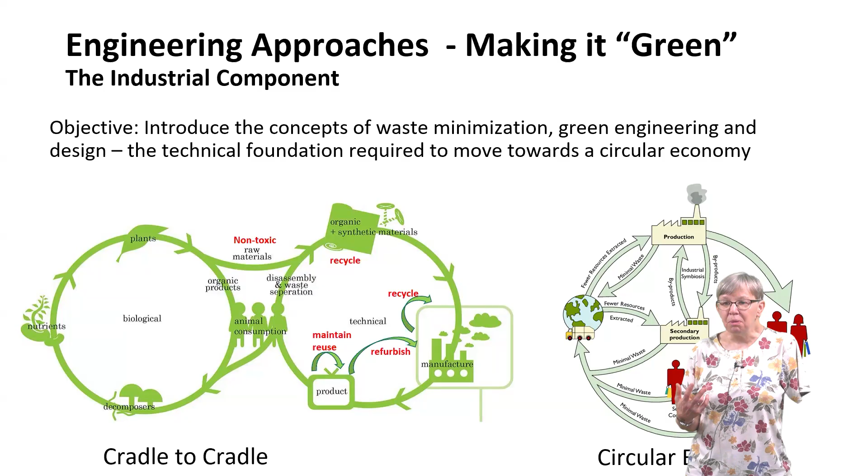So those are the two essential elements of the circular economy.

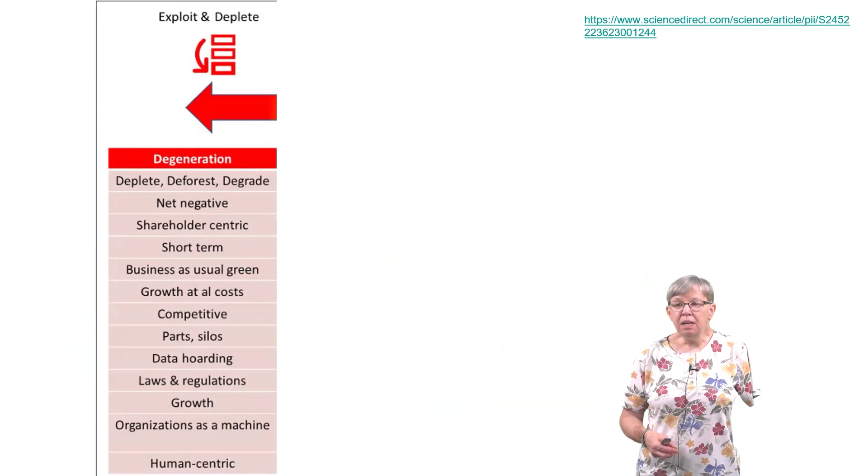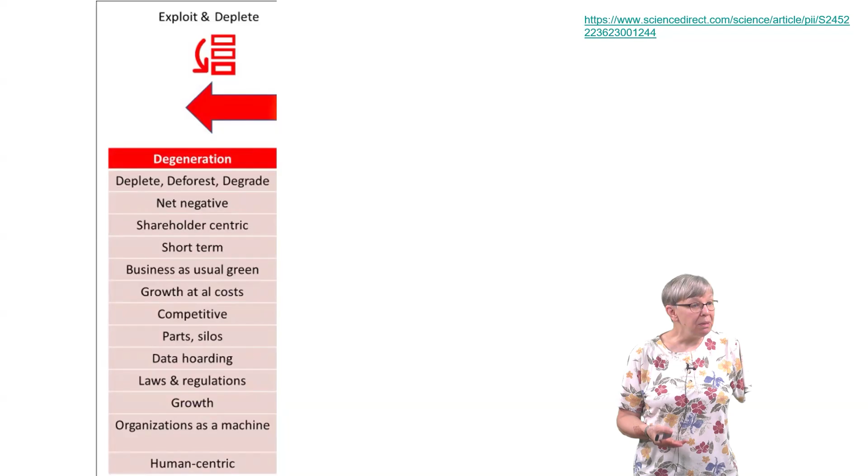So let's just briefly review the history. Until about 20 years ago, maybe 30 years ago, we were in this exploit and deplete sort of mentality with industries, and some industries are still there, right? They're not worrying about any of this. They just want to make a profit, and that's all that they are thinking about. And it's not economically viable, right? They would be doing economically better if they thought a little bit more.

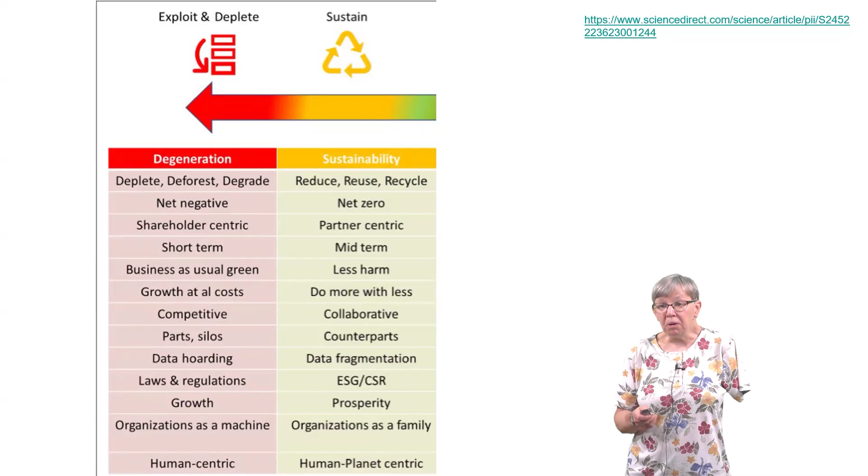Right now, we're sort of in this sustain what we're trying to do mode. So we hear the terms net zero, less harm, collaborative, ESG, prosperity. So it's more of a combined human and planet-centric approach, which is what sustainability is, with humans being both the social and the economic.

But where we really need to get to - remember that first day with what Professor Indu showed us with meeting the planetary boundaries - if we really, truly want to sustain our Earth and sustain our life on the Earth, we need to think about this regeneration and regenerative approaches. Has anybody heard that term before, or applied to any industry?

Regenerative farming. Absolutely. I'd say that's where the most progress has been made. So in my part of the world, that means that you have cows who are out in the field, they're pooping on the field, then you put the chickens out in the field, they eat the undigested grain that's in the cow poop, but the nutrients go back into the soil, and then you grow crops after it's been fertilized and basically weeded by the chickens. So that's regenerative - you're not adding pesticides, you're not adding nutrients. And it also, with better growth, you don't need to add as much water. If the soil is healthy, the soil retains more water. So that's a great example.

Anybody else seen this term used in anything regenerative, anything other than agriculture?

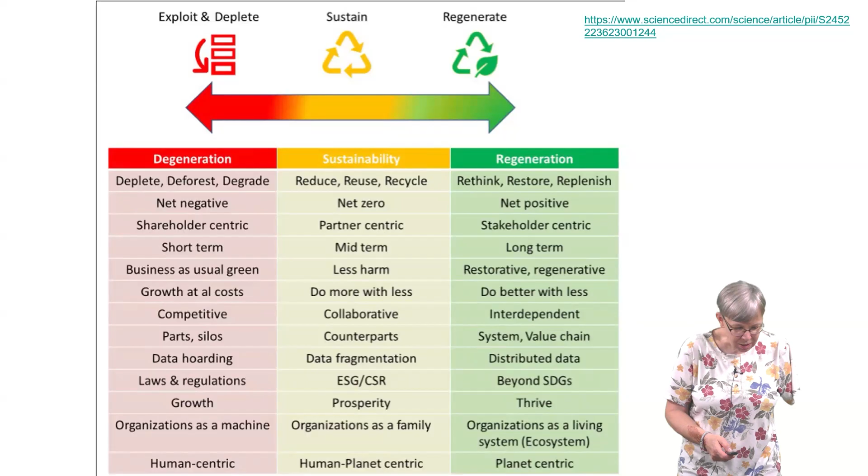So we've talked about all these words: remanufacturing, post-consumer, pre-consumer, recycling, reuse, non-toxic, use of organics. I think you get the cradle to cradle or circular economy philosophy. Everybody's on board? So now let's think about how we do that.

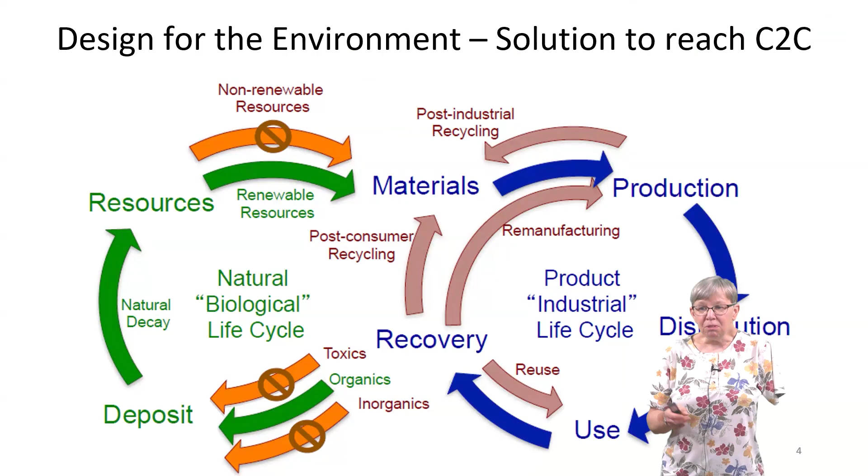Remember, I told you this first cradle to cradle document came out in 2002 - so this is about the era, 2 decades old. This is from that first book. These were the first set of rules you might follow. We're going to go beyond this, but just to give you some idea of the starting point.

In India, can you still buy compact fluorescent light bulbs? Anybody buy light bulbs? In the United States, they've been totally replaced by LEDs, in part because LED technology has progressed so rapidly in just like 5 years. But it does away with that known culprit - how can we make a light bulb that doesn't have mercury in it? We can make LEDs and sell LEDs instead. I don't think you can buy compact fluorescents anymore, at least not the things you'd screw into a typical light fixture.

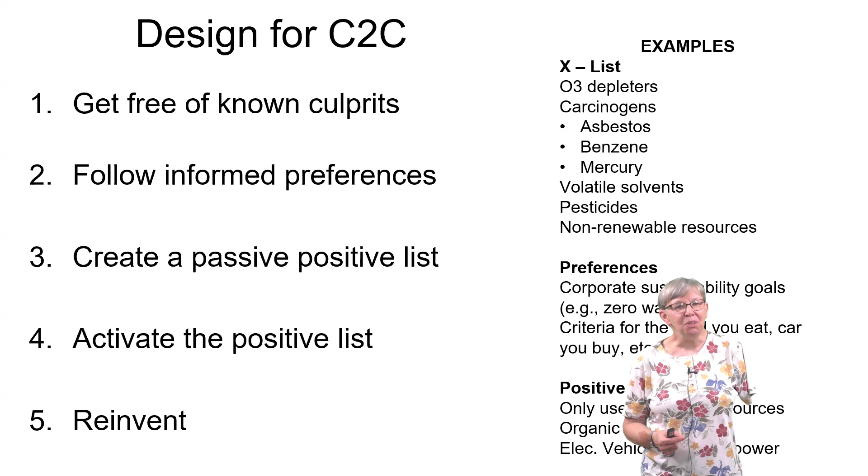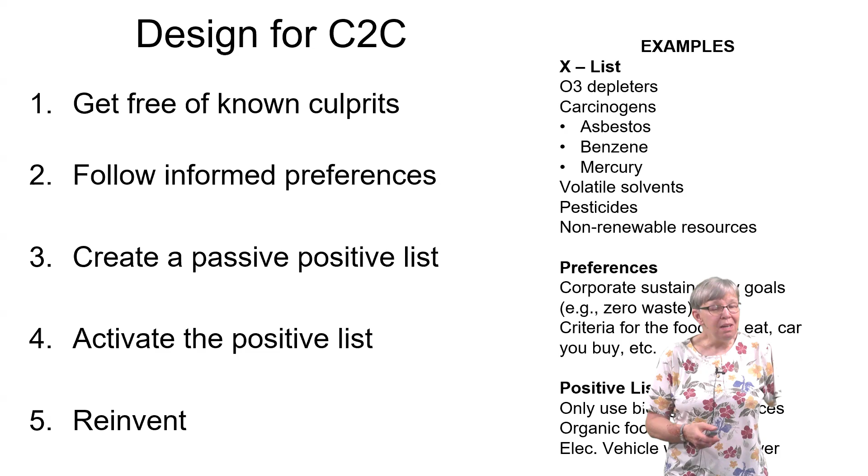So don't just talk about these things, follow through and do them. And then reinvent - that's that big word. Reinvent gets us to that green zone I showed on the first slide - just totally rethink the products and our systems and why we're doing this to begin with. We're going to talk about that a little more, the big picture changes, tomorrow. So that was the first one.

As history has progressed, we've talked about this circular economy, eco-industrial parks. There were some images on day 1 or day 2 notes that I didn't get to, but there's a place in Denmark doing that - industries are sharing water, they're sharing waste heat, they're sharing gypsum, they're sharing all sorts of material, energy, and water resources.

Green technologies - we've seen some green technologies: the anaerobic digester, the fuel cells, the electrodialysis, solar. We've seen green technologies, and some of you are working on green technologies.

What our projects are oriented around is this new concept of product use and product - what are we doing, what's the end of life? So this is all those R words. I have them, not just R words, but that list of 11 R words that Professor Indu showed you the other day - just keeping them in the circular economy. So that's sort of what we're talking about now.

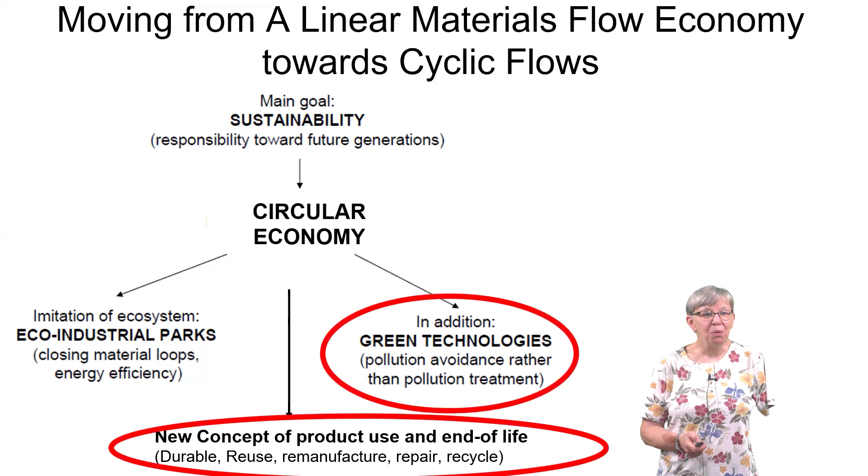So pollution prevention. Yesterday, my number one rule of pollution prevention: if you've got a really concentrated waste stream and a dilute waste stream, do not mix them together, because then you've got a whole lot of volume you've got to treat. That's why I asked Professor Indu yesterday about the dye and the textile industry mixing that really concentrated material with something a lot less concentrated. We hadn't gotten to that slide yet, but their recommendation was to not combine those, because otherwise you have to oversize your treatment system to treat all this volume.

There might be reasons to do it both ways, especially biologically. But for any physical-chemical treatment process, that's basically the number one rule of pollution prevention: don't make more polluted water than you started with, which is basically what that textile industry is doing.

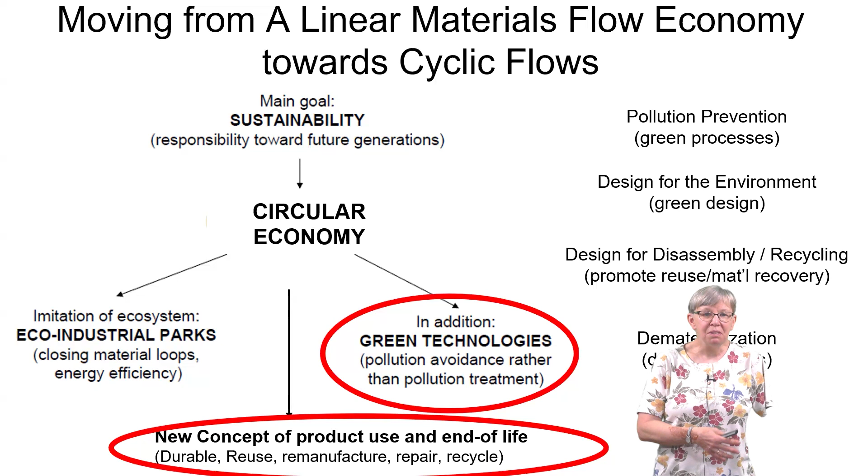Design for the environment, that's what we're going to talk about today, and that includes disassembly, recycling, dematerialization. All of that's part of design for the environment.

So we want to change the products, or how we use them, or how we make them, or how we manage them at end of life, something along any step in that life cycle, the raw materials used, any step in the life cycle, to reduce material and energy use, and reduce the toxicity and hazard of the materials. So anywhere in the life cycle we can fix.

So when you think about your projects, it might not just be the materials used. It might be, can we just use the lights less frequently? Can we generate less food waste? Those are other places in the life cycle that are sort of outside of what you're looking at in your project, but might be very realistic changes that have a bigger impact than tweaking something.

And so you really need to understand the life cycle impacts, and that's why we have this as a tool. We've got these ways of thinking about changing our designs, but then we've got the tools to actually assess: is this better? Because sometimes we make changes that don't end up being better, or they're better in one sector but worse someplace else. There are other tools too.

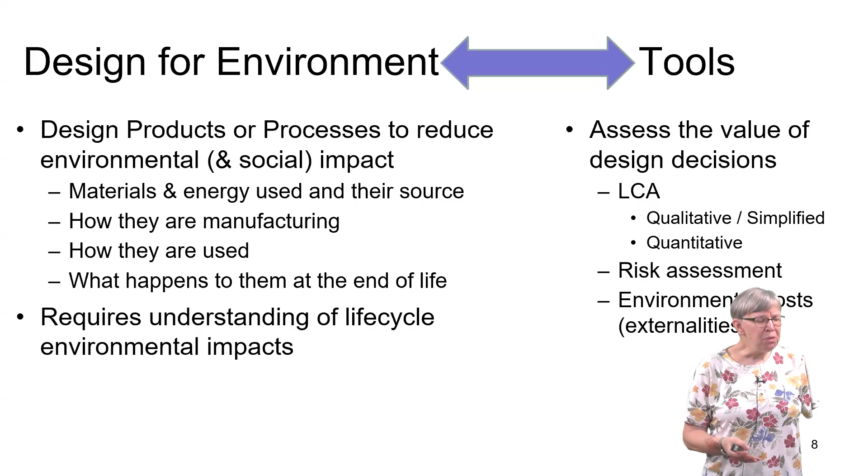There's a lot of talk about that when we're talking about nuclear energy. In my neck of the woods, people are very concerned about the risk, and the risk can be horribly catastrophic, like the Fukushima meltdown that happened after an earthquake and tsunami wave in Japan. Absolutely catastrophic for the people who live in that vicinity, but globally it's not catastrophic, and it's also very, very low probability.

So that was a case of very low probability, high consequence, local impacts. If you compare that to climate change: the probability of climate change is very, very high, super high, it's happening right now. The consequence is coming in slower than the probability, so it's maybe lower right now. And the geographic reach is global. So we have a very high probability, consequences that will get worse and worse—right now they may be moderate, but they will get worse—and a global reach.

So when you think about whether nuclear energy is something that will help mitigate climate change, yes, there are risks, but there are also risks to burning coal. There are risks to any of our energy systems. People think about the risks of nuclear energy because of those very few, very low probability, but catastrophic events when they happen. It's not like they will never happen, but it's very low probability and localized.

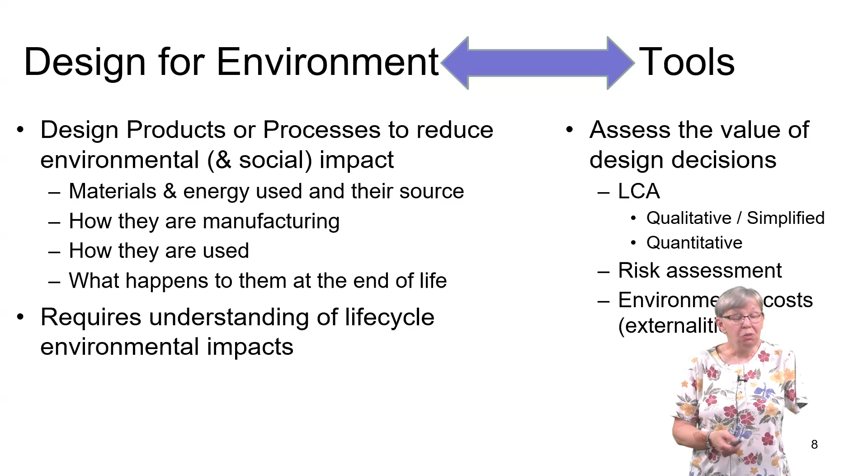So it's hard, right? But that is another tool in our toolbox to think about design for the environment: risk assessment. And then also environmental costs, which we're not really talking about here, but the externalities—the cost associated with the Fukushima disaster was billions, maybe even trillions, I don't know a number. The cost of something like superstorm Sandy hitting New York City, which is very highly populated, was billions, and that's a climate cost. So there are ways to think about the costs of these things associated with the environment. We're not going to do those here, but I want you to know there are more tools in the toolbox to do this kind of work.

Can we turn the AC up a little bit? I'm going to have to take my glasses off, I'm steaming up over here.

But anyhow, there's a couple of examples, and you looked at some of these on day one when we looked at the Ellen MacArthur Foundation — the same sorts of things.

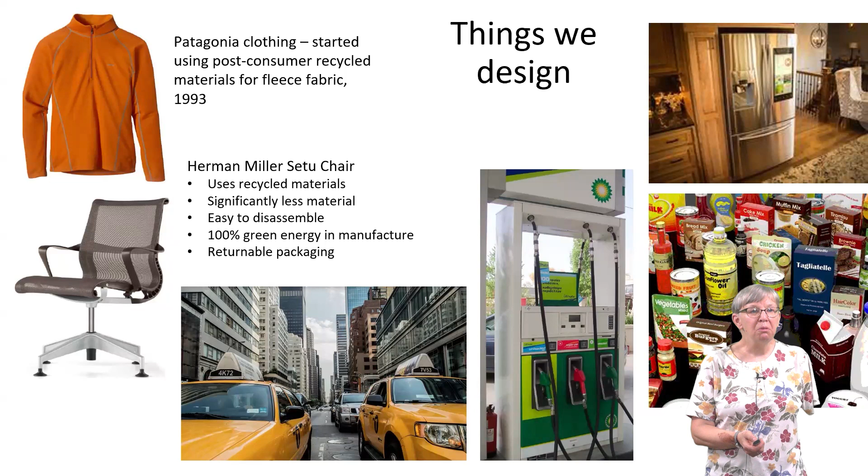We'll talk about cities tomorrow, but more about chairs today. Remember, we've seen this picture in a couple of different ways. You've got to know if the challenge with your product is material intensive, or about end of life, or about how we use it — you need to know that to know how to best fix it.

So if you have a laptop computer and your biggest concern is the energy use while using it, what are you going to fix — that littlest of the blue bars? Maybe it's a good thing to do, but your energy might be better spent thinking about the materials it's made out of and how much of that material you need.

You might still need some of those rare earth minerals, but can we use less? You might be able to cut that bar. It's partly in the actual materials, but also where they come from — if some of those rare earth materials were recycled instead of mined, that would cut it.

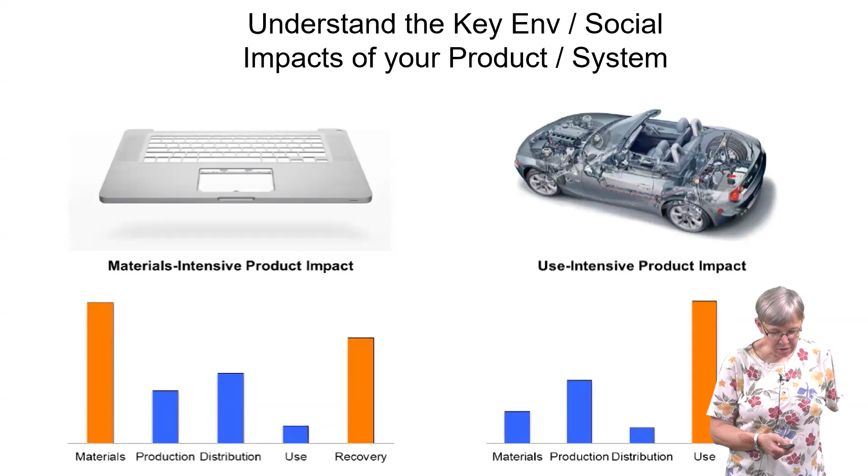But in an automobile, the use phase is most intensive, so changing how much energy it uses during use would be the most important thing to do. It's not that you don't want to still work on the other things, but if you only have so much money and brain power, put it toward your priorities.

All right, so we need to know that. Minimize — if you have less material in your product, you have to pay for less. It's just like food waste: if you're not wasting food, you're feeding more people with the same amount and don't have to buy more.

So it's a huge economic benefit for industries, and sometimes that's how you have to talk to them — not about environmental impacts, but that making these changes will reduce their cost. If you're removing toxic materials, you'll reduce the cost of hazardous waste management and wastewater treatment. There's almost always a capital cost to change.

There's always a capital cost to change, but over time, the benefits of buying less inventory and treating less waste are really, really valuable — or maybe you can even sell your waste, since your waste product might be useful to somebody else.

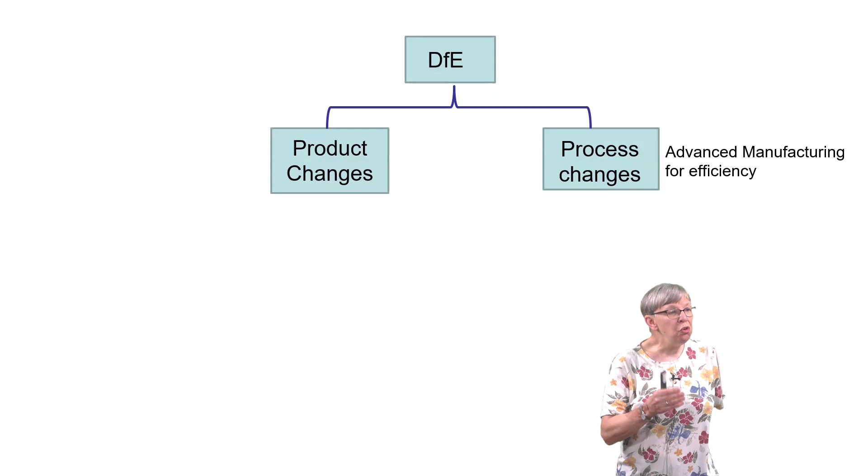So in design for the environment, there are two big categories of things we can do: we can change the product, or we can change the process — how we make it, how we use it, what we do with it at the end of life.

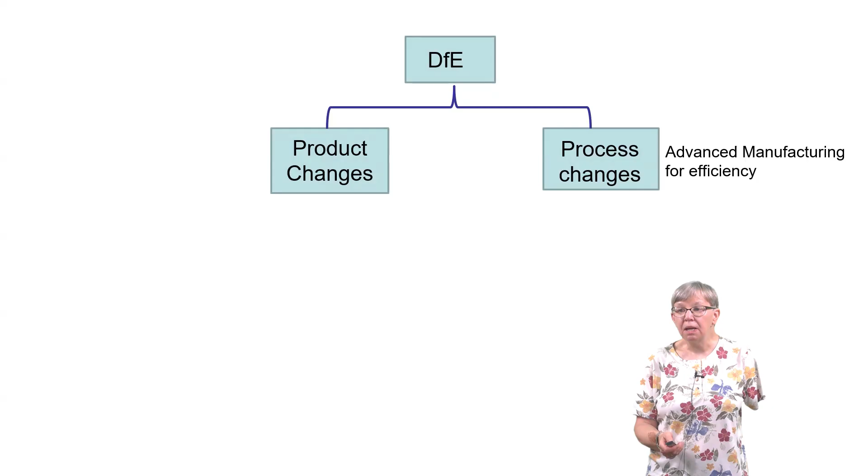So both of those things are possible when you think about the changes you might make. Product changes mean we can make a different product.

Why do we need this? Should we be making this to begin with? Those are pretty big questions, but also think about materials - less material, less toxic material, maybe bio-based.

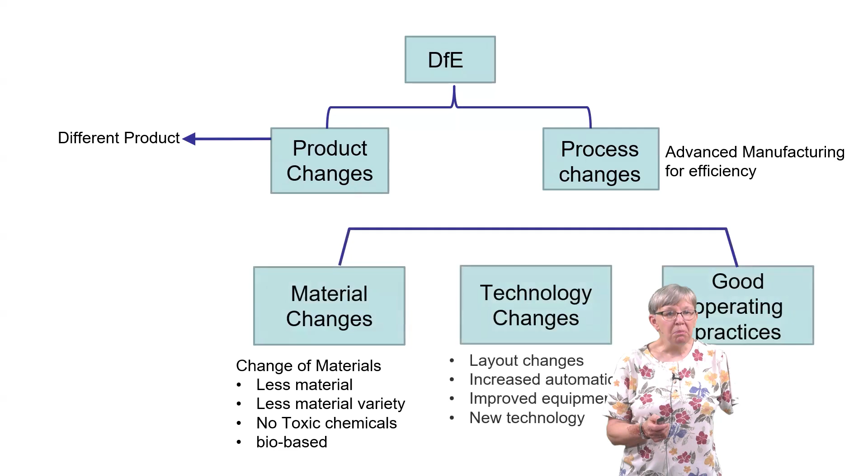And for the process changes - some of my animations here didn't come through. In addition to the material changes, that results in a process change. You can change how you make it, the technology, your manufacturing line, you can add advanced manufacturing. Advanced manufacturing is the talk of a lot of robotics and automation and sensors and controls. That often increases efficiency greatly.

How much of that raw material that you bought actually ends up in your product? Because it's more careful, there's less human error. So advanced manufacturing is a really good thing for design for the environment.

And good operating practices - that's again when I started doing sort of pollution prevention, the first step in all of this in the 90s. Even when Indu was a student, and Laura Weber, a fellow student back then, went into industry and looked around - that audit, somebody talked about a water audit. That is a design for the environment.

You go look, if that faucet's drip, drip, dripping - that is waste. It might be a faucet of water, but it might also be a faucet of some more hazardous material or something more expensive. So making sure the valves work, that things are working the way they're supposed to be working, because it might have been designed great, but it's not operating the way it was designed - the manufacturing facility or how we use it.

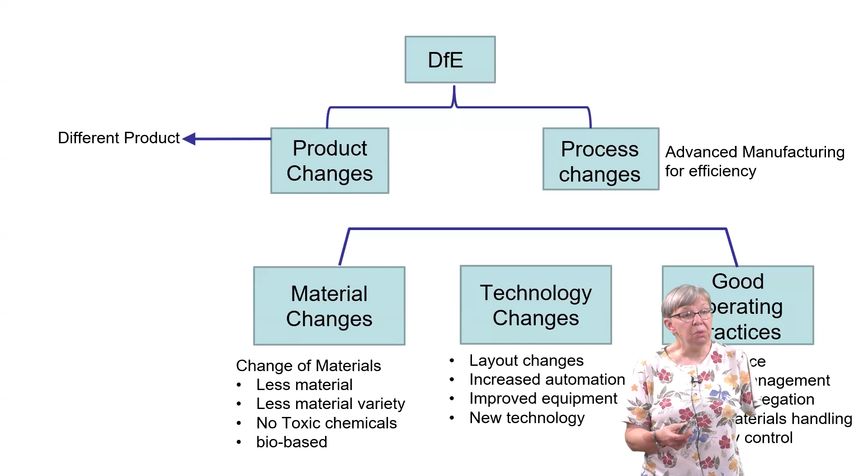So those are, big picture, all these different things that we can do to think about your product or the process. And these lists right here, most of these changes are just in the manufacturing side, but it can also be on the use or end of life side as well.

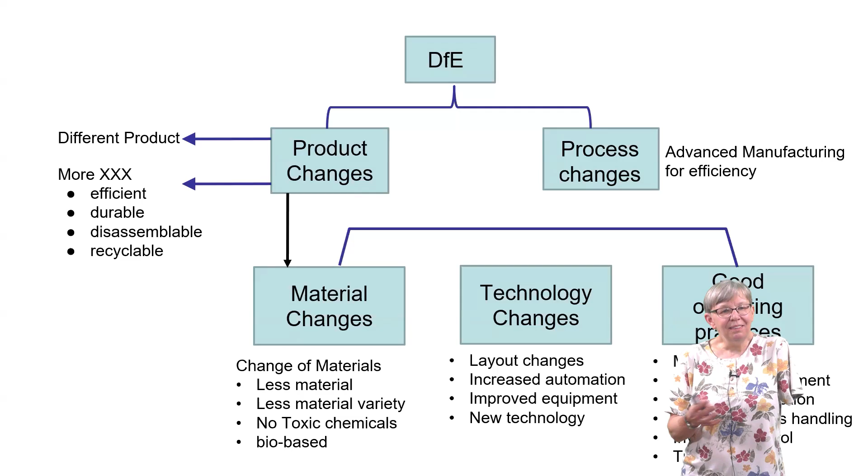All right. Yes, my animations definitely ended up in the wrong order - sorry. So often you have all sorts of things you're trying to accomplish in a product change: efficient, durable, disassemblable, recyclable - all of those are words. That's part of the product changes.

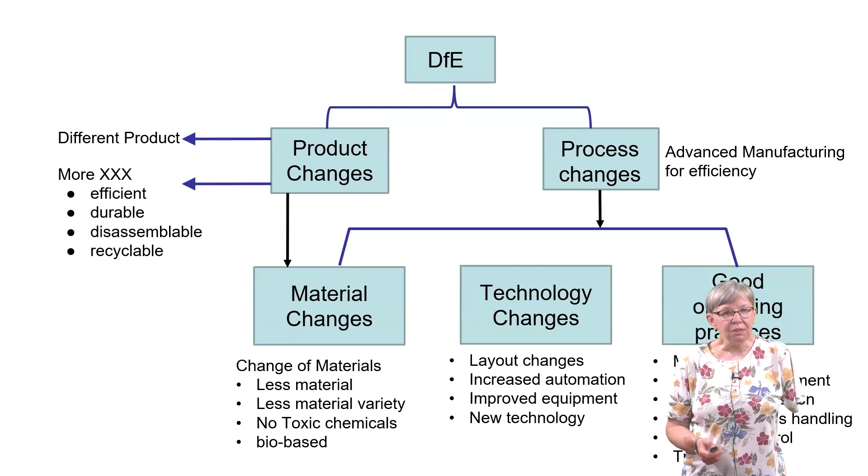I don't know if you've seen some of this. Many forms of design for the environment. So industries in India right now are designing for zero water discharge. That's a design for the environment.

Not necessarily - we heard yesterday it might not necessarily be the overall life cycle system's best solution, but that is a design for the environment approach. Design for zero something - zero toxic, zero energy, zero water, but also efficiency, maybe manufacturability. This is something that's always been done - you want to design something that can actually be made, and maybe made in a more efficient manner.

So it's all sorts of design for - these are all designed for the environment. We're not going to go through all of these, but I just wanted to let you know that there's lots of different approaches for this.

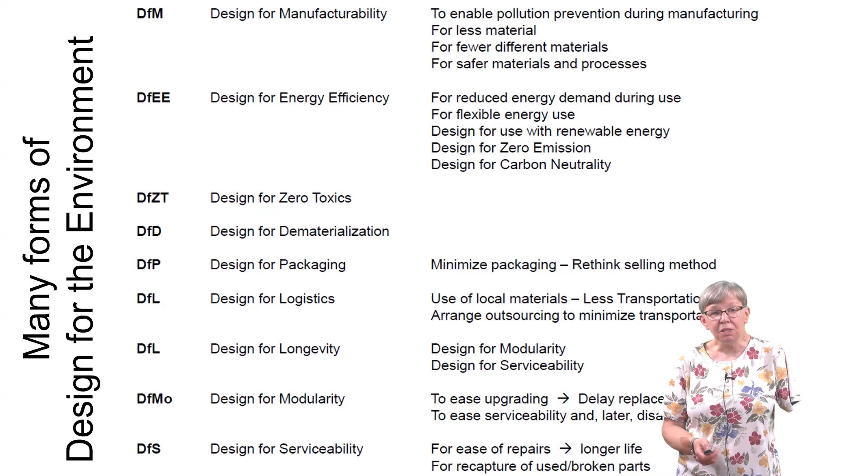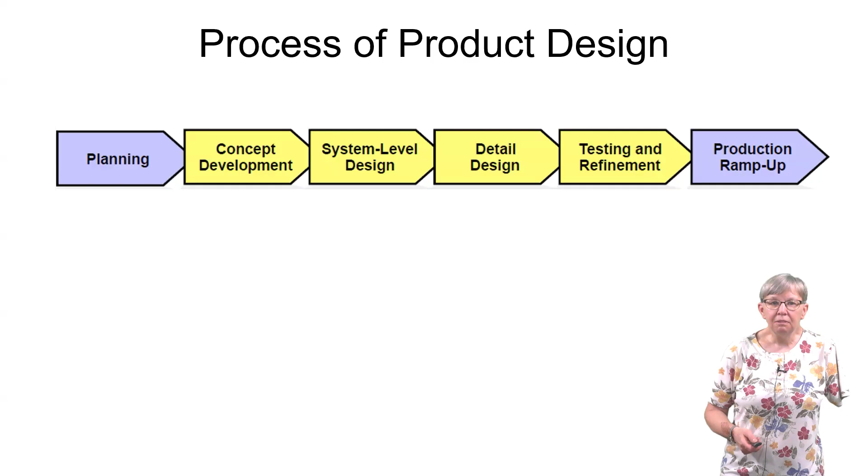It is really, really important that design for the environment elements come through at the beginning. It's much easier to do this from the start of your design rather than redesigning a product. When you're thinking right now maybe about redesigning products, but this is really - you want to start it from the concept development, avoiding the known culprits, right? All of those things from the cradle to cradle list, and we'll get into more lists. There's all sorts of lists.

So mostly this today's PowerPoint, I'm not going to go through all the details, but it's a resource for you to think about what those lists look like. But it's really important to do it at the start, and once you've manufactured or you've got a prototype and you test it, you don't just test whether it technically does what I want it to do, but did it meet my design for the environment goals?

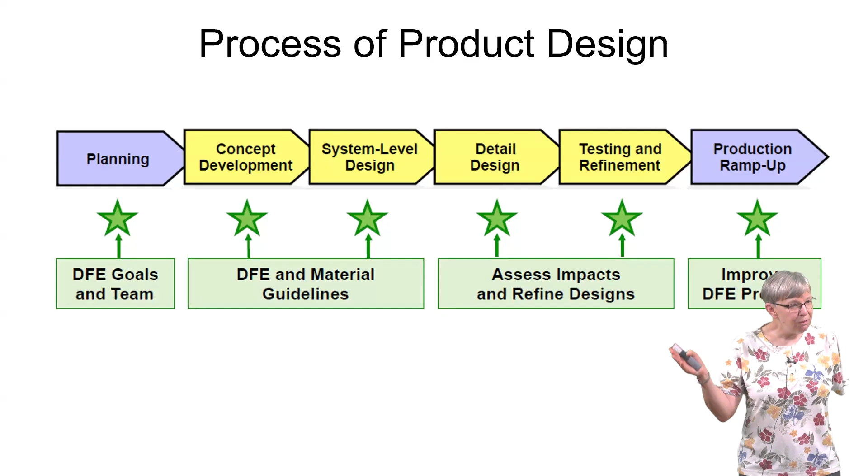That's got to be part of that prototyping, pilot, whatever the steps are, you've got to check it again. You do not want to build at full scale and then have to go back and fix it at that point. If somebody says design for the environment, you want to do it at the beginning.

The life cycle assessment really comes into play once you have a detailed design and some pilot testing. Earlier on, you can use more of the guidelines, but you don't have data to do a life cycle assessment early on. Once you start to get a detailed design, you can model the system. You can look in the literature, and even though you don't have pilot scale data yet, you do have the capacity to still do some level of life cycle assessment.

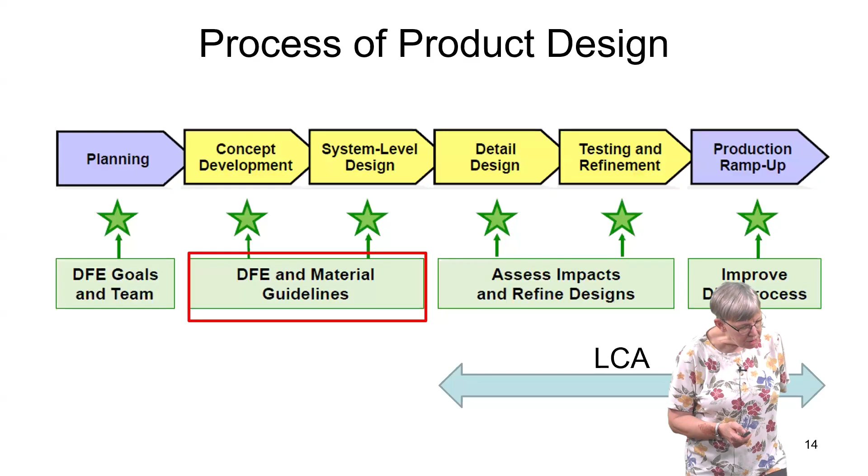We're going to dive somewhat deep into these material guidelines for design for the environment. There's a lot of words on these slides, more than usual, because this is a resource for you. We're not going to go through all of these—anybody can call out and pick one.

Use screws and other fasteners that can be undone. Every time you build something with rivets, you cannot take that apart to reuse the material. If it's something that is screwed together, then you can unscrew it, take it apart, and reuse it. So that's just an example.

You can't recycle it. Somebody mentioned fiberglass recycling—I don't remember who or where, it was sometime last week, maybe in one of the research tours. Fiberglass is really hard to recycle because you've got the fiberglass itself plus all sorts of epoxies that are hazardous, dangerous, and toxic together. So it's really very, very hard to recover the glass part.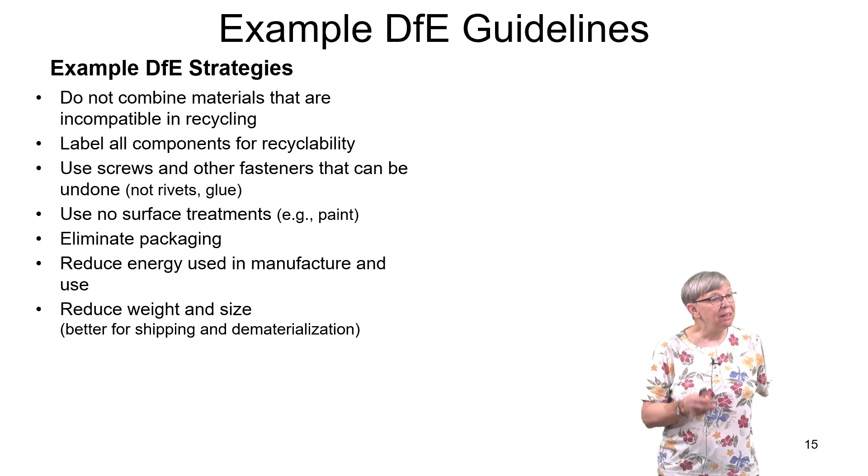Same thing with carbon fiber material—it's a great building material, but then you can't really recycle it. So the more you can stay away from those multi-layer constructions that you can't take back apart, the better for recycling.

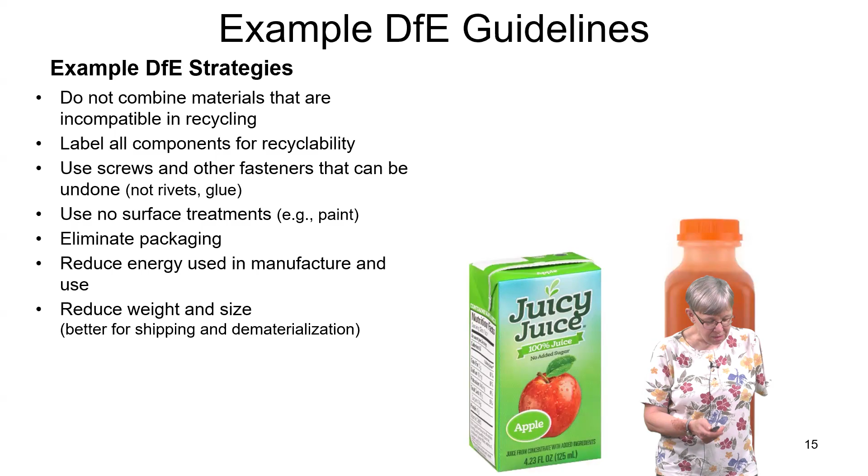Oh, there's my juicy juice box—I know it was on one of the slides. So the alternative is just polyethylene, which can be recycled. That's an example. They both function the same. You don't have the nice little straw, and maybe if you've got little kids, there's more likely to spill from the bottle than the juice box. But for everyday purposes, the one that is easier to recycle has all the functionality of the other one.

PET is the same way—it's the easiest to recycle. So those water bottles are at least easy to recycle, but we don't do very well recycling them. In the US, only 10% of plastics are recycled. We'll probably get to that after break.

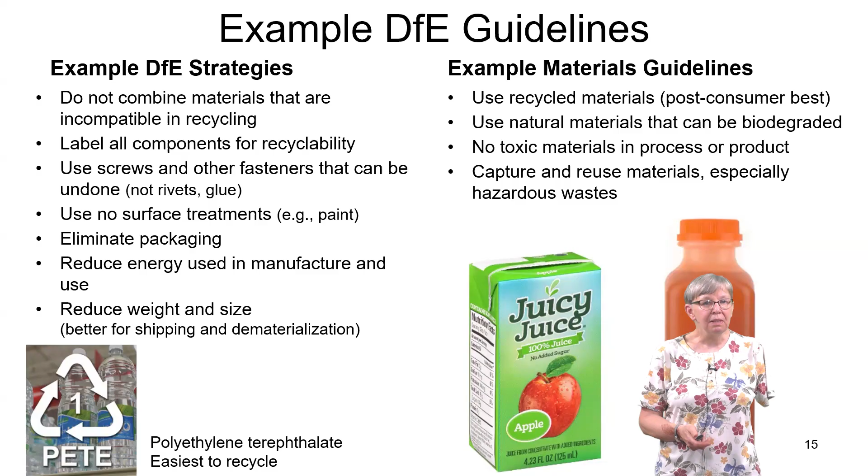Good guidelines—using recycled materials, the more you use recycled materials, the more there will be a market for them. The circular economy only works if there's a market for those materials. You might feel great putting it in the recycle bin, and then it gets separated, but if nobody's going to buy that and provide some economic value for it, even though you did your part, the circle is not complete. So all pieces have to be complete. We've talked about all the rest of those.

We're going to do an activity here. For people online, I don't know if we can go to Zoom—how many people are online now? Nine. Can we put them in three breakout groups?

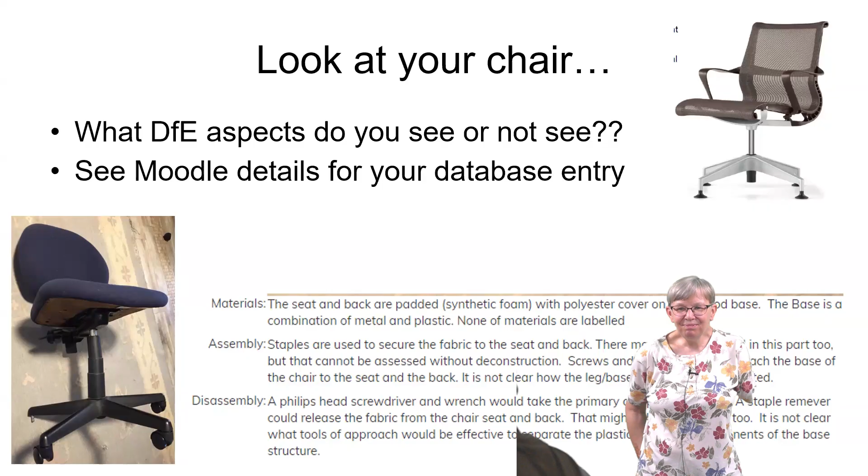All right, so greener materials: non-toxic, bio-based, low embodied energy, right? Even if they're from non-renewable resources like steel versus concrete versus wooden structures, those are things to consider—but also chemically safe and healthy. We're going to talk about that a little bit.

So just an example I found in India—the Indian Green Building Council, which we heard about 2 days ago. Here's a paint manufacturer that received a Green Co rating.

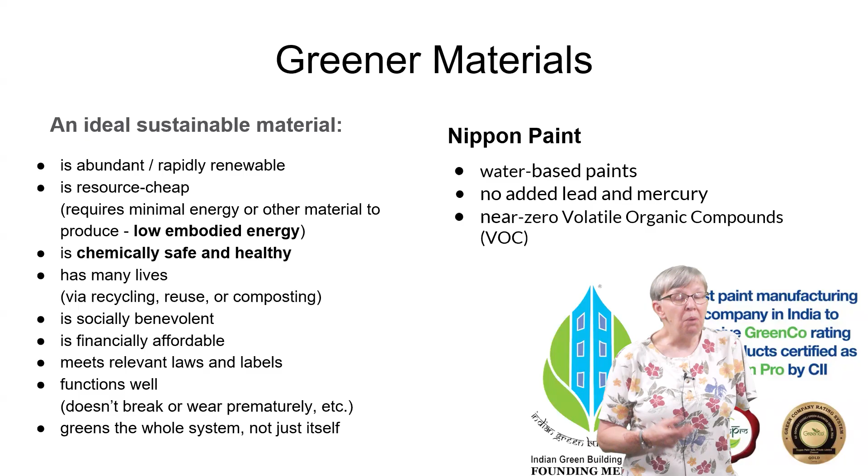It's water-based paint, no lead or mercury, which are sometimes added as part of the pigments, especially lead, and near zero volatile organic compounds—so you don't get that new paint smell, or that new car smell. Those are VOCs, and they're dangerous for you. You might like a new car smell, 'oh I've got a new car,' but it's really dangerous—it's all the foam in your seating off-gassing volatile organic compounds that are not good. So that's an example of a product and a company committed to this.

So embodied energy, we've already heard about—I made this slide before Indu did her stuff, but I'll leave it here. There are all sorts of lists of embodied energy and carbon dioxide output. There's one more list—you had a couple from citations down at the bottom, the circular ecology carbon footprint database, which are in Professor Indu's textbook. If you don't have her textbook, that's a site you might check for information about the embodied energy of materials.

It depends on what your system boundaries are for embodied energy. If you're using a product, the embodied energy is everything upstream of making it, but also its ultimate disposal. If you're a manufacturer, the embodied energy is everything upstream of that manufacturer and everything downstream of it. So whoever's in the middle, whatever use phase you're in, everybody else is the embodied energy. But that data is available.

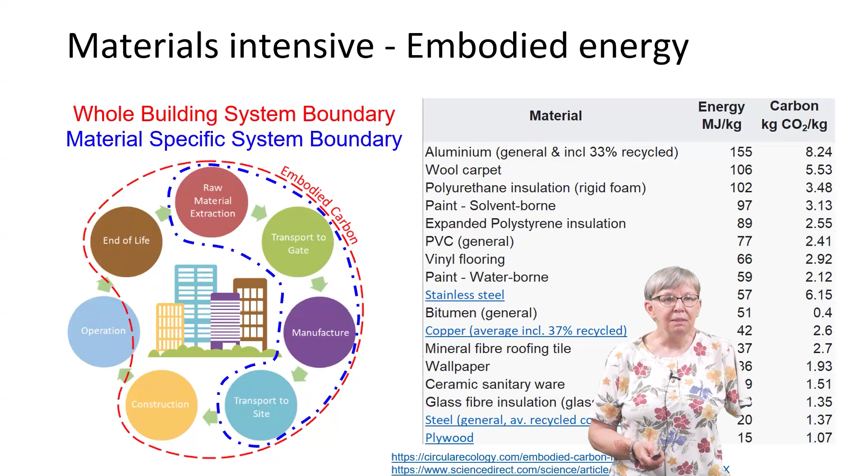So it's very much a life cycle approach, and they're looking toward this too. It's something to look for in the future, something to pay attention to—we're not quite ready yet to teach you how to use this because it's not quite there.

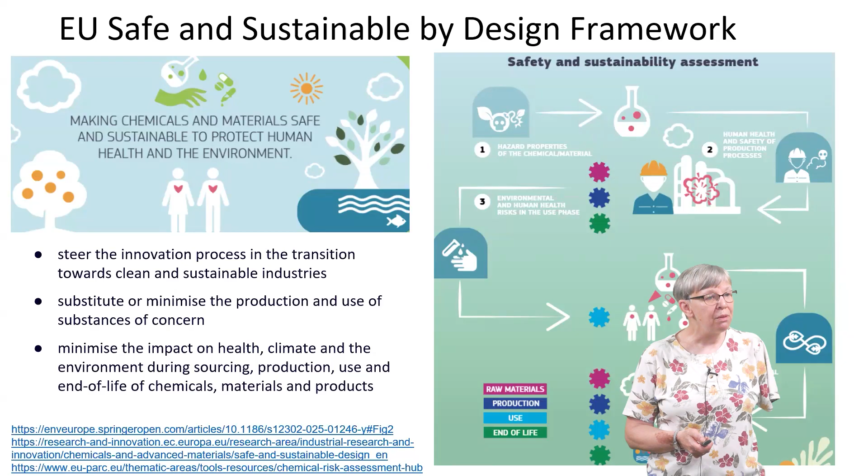But it is something that is up and coming because there's lots of people doing the same thing that you're doing here, learning how to do this. So this will be another great tool that will be available. It has more risk assessment built into it as well.

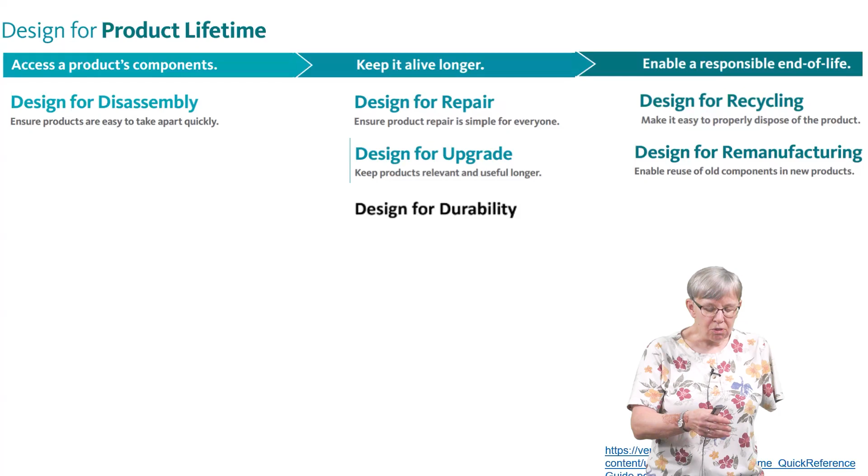But basically, you want to think about the product's components, how to keep it alive longer, right? The more durable it is, that's key. Just use, before we think reuse and recovery, just use it longer. Buy clothes that are made to not fall apart. Just using it longer is the number one thing you can do for the circular economy. And then enable a responsible end of life, so recycling and remanufacturing. There's a long list for each one of these at that link.

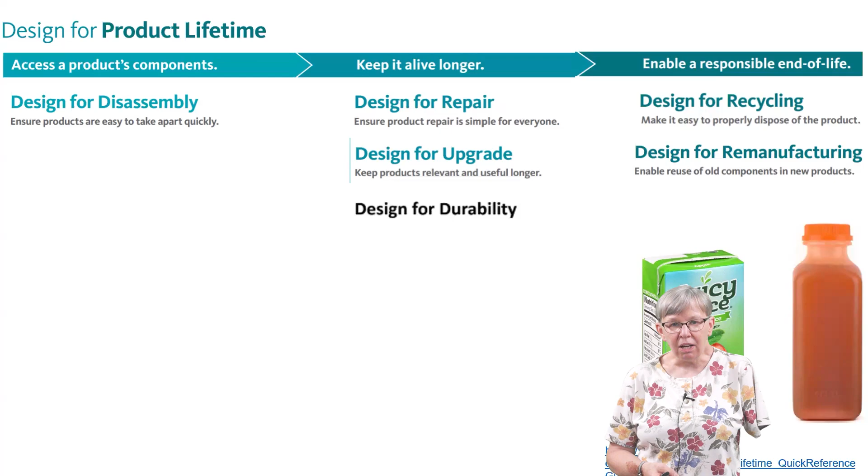So we talked about this juicy juice, the juicy juice is not designed for recyclability, right? It might be designed for ease of use for the consumer, it packs well. There are boxes, so if you think of cartons and transportation versus the top of the other bottle, this packs a lot. This is the detail, as I said, that I am showing you so that you know this is in the PowerPoint.

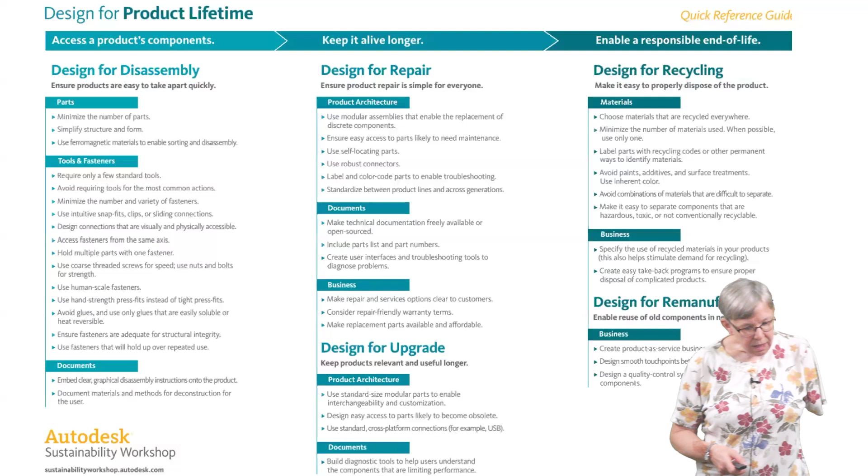So when you're thinking about your projects, what does design for disassembly mean? Is it something that would be relevant to my product? You've got this whole list. So I gave you the big words, but I'm not going to talk about this in any more detail. I just wanted to make sure you have this quick reference guide, and the link to the original was on the other page.

So durability is another big thing, right? If we can just use stuff longer and not have to buy new, that is the most important thing we can do for design, just for circular economy overall. So durability is really huge.

So be tough, right? It's a tough material. This wooden stool is tough. The chairs with the padding, we know those seats are going to get worn because people slide in and out of them. We know those desktops are going to get scratched, especially with that material. So design to be tough so that they don't scratch and don't have to be replaced.

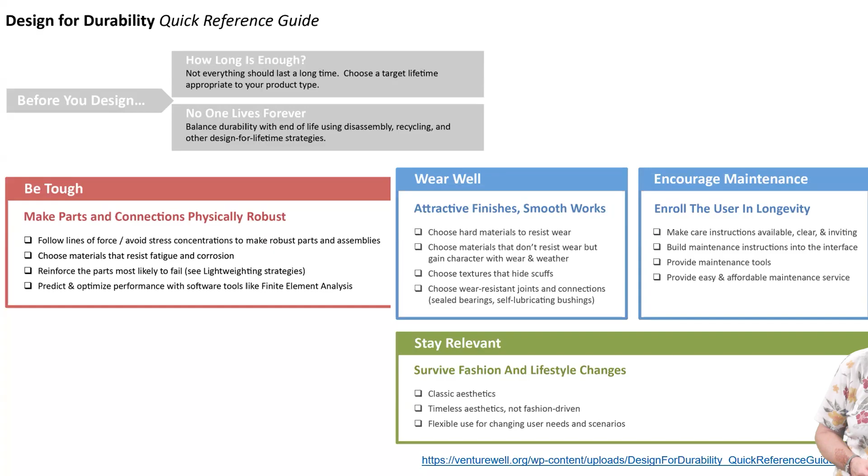There's all sorts of suggestions for this. Partly it's thinking about, if you have to pick up those desks or tables to sit down, was that easy? If there was a lot of force required, you could imagine over time those might break. So think about the stresses on the materials and different parts, the more you can reduce that, so you're not fighting your product, it's just easy to use without forcing anything.

So wear well, right? The finishes are attractive, but also aren't going to wear off. Encourage maintenance, regular maintenance is really, really important. Like these chairs with all the mechanical parts, I can imagine a squirt of WD-40, a lubricant spray in those moving parts once a year, that might make those hydraulic things work better. So think about what the maintenance is and make sure the user actually maintains and does whatever that is.

So that's good, and just stay relevant. Fast fashion is not relevant, right? But if you buy classic clothes, like for example saris in India, they never go out of fashion. Do the fabrics or anything go out of fashion? Not really. So you can wear your saris for decades, the same thing.

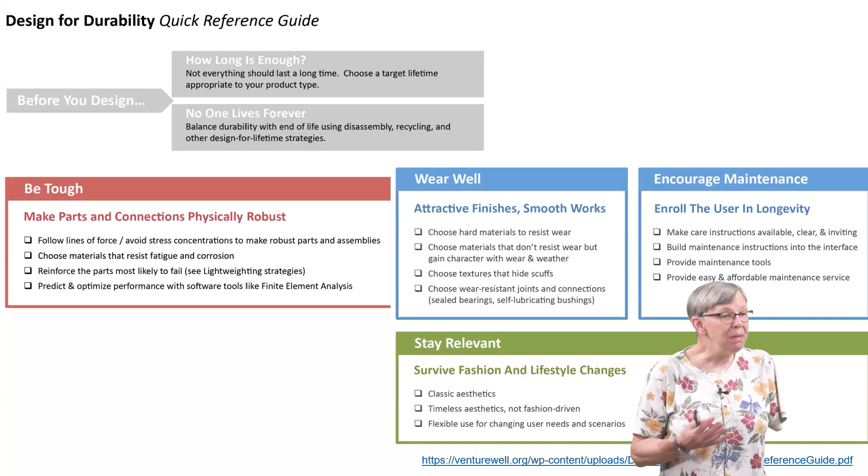The toy of the year, right? But then it goes out of fashion. So the stuffed animal that I saw back down there stays a relevant toy. I still have a few of my stuffed animals from when I was a child. They're kind of fragile at this point, but those stay, they don't go out of fashion. Maybe you outgrow them some, but it's not like the toy here. When you think about what's timeless, the more you can think about your product staying in the economy for longer.

All right, so what can we do for design for the environment? Here's another example, we've seen graphs like this before. So this is a t-shirt. The biggest impacts are on materials and manufacturing, and that's mostly the cotton cultivation, but also the use from washing, especially if you use warmer water, lots of water, depending upon the efficiency of your washing machine. So the organic sweatshirt, these are sorts of things.

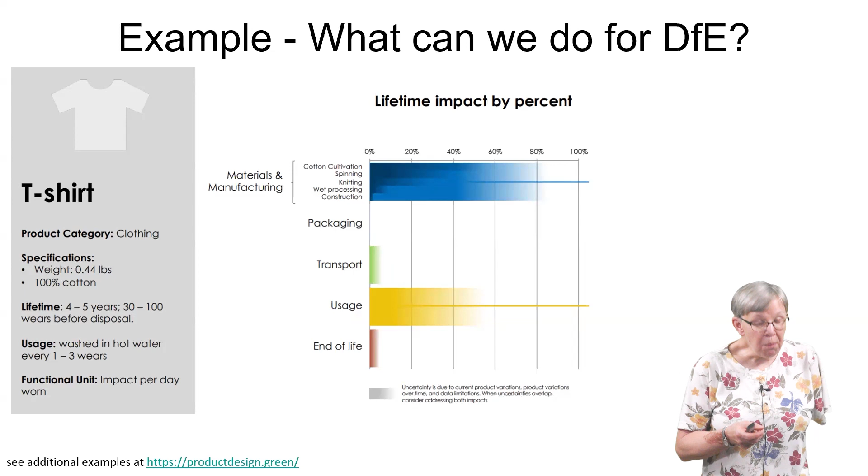So what are we going to do? The shaded blue and shaded yellow mean there's a lot of uncertainty, depending on the situation. But we know we can do something to improve the materials. We can choose more sustainable materials, right? Organic cotton instead of traditional, factory farmed cotton. That would be a big difference. Making sure that we use it efficiently, and we cut out those sweatshirt or t-shirt shapes in a way that there's not lots of little pieces of fabric left over that you can't do anything with.

We can design for durability, making sure that the seams are well sewn and it's not going to get twisted. That will help to keep it going. Design for repair—yes, if it rips, you can patch it. You can do something, that's true with all clothes. And then for the t-shirt, just change the culture to accept fewer washings. That would change things the most.

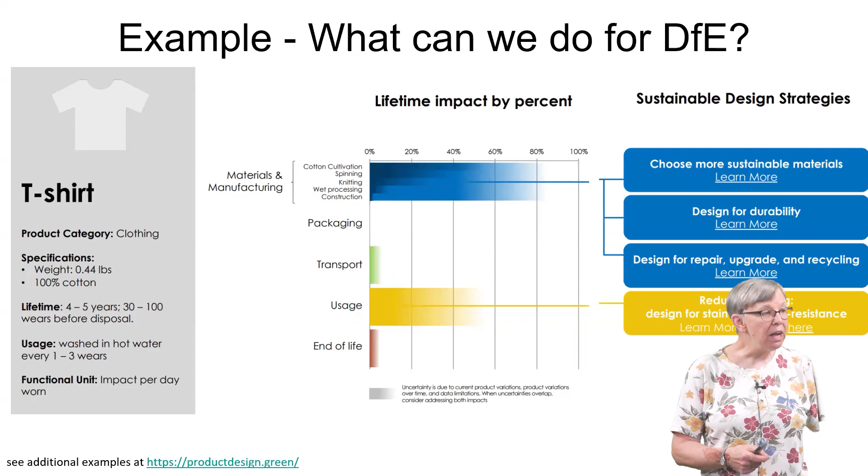So this is just an example of once you know what those life cycle stages are, or the particular elements of a life cycle stage that are causing the biggest challenges, you can try to figure out what to do about those challenges and come up with solutions. This is the level we want you to think about in your projects, like a graph—even if it's not quantitative—where are the challenges and what are you going to do about those biggest challenges?

All right, so just to summarize this part, we need pollution prevention. That's reducing waste, non-toxic substitution. We need to change our product and we need to change the process. Some of that might just be tweaks, like fixing leaky valves, but that can make a big difference—it might be a really big change to whatever you're making. So there's a long list of things to think about, and you need to go through every one of those checklists.